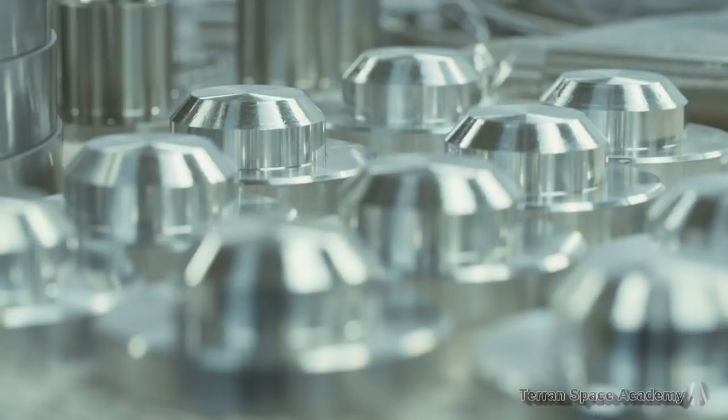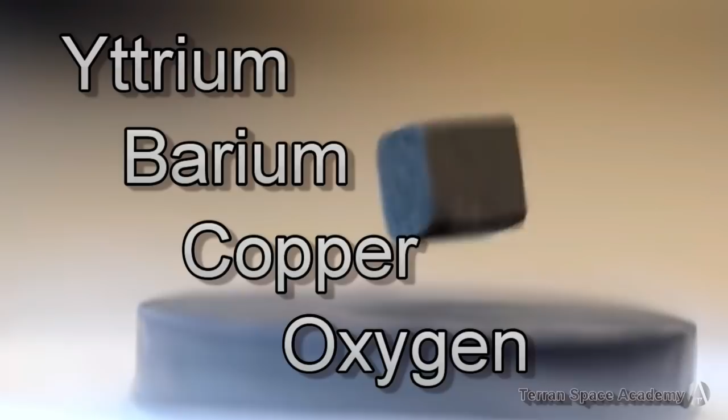Now on to superalloys. Superalloys describe combinations of metals that produce an alloy with unexpected strength, hardness, thermal resistance, or another useful characteristic. We see this all the time. None of the elements yttrium, barium, copper, or oxygen are superconducting at high temperatures, but the combination, while not an alloy but a ceramic, produces the high-temperature superconductor used in the SPARC reactor, as we learned in our lesson on superconductivity. We saw in our lesson on Starship Steel how copper and tin make the more durable metal bronze, while alloys of iron can make steel.

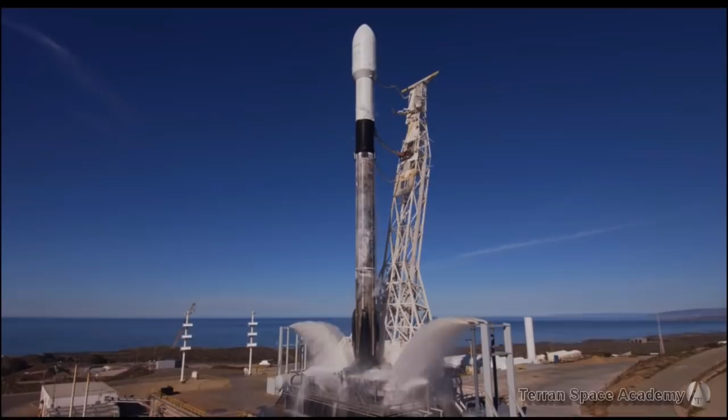And in the lesson on aluminum alloys, we saw that a combination of elements can produce a lightweight but strong version of aluminum that is vital to the success of the SpaceX Falcon 9 reusable rocket. Now we are going to learn about two alloys that have useful characteristics far exceeding those of the elements from which they are composed. The first alloy you need to know is called Inconel.

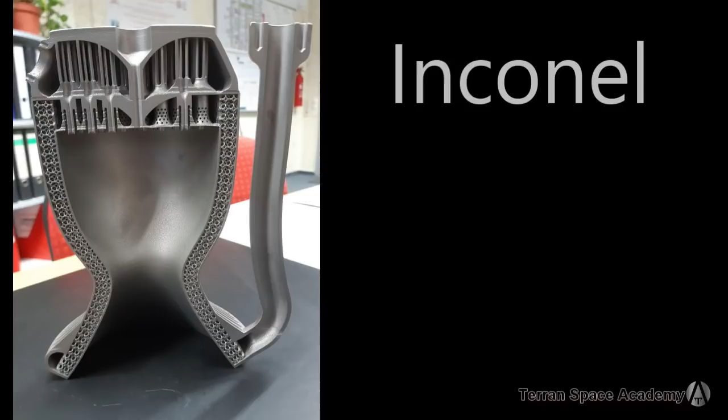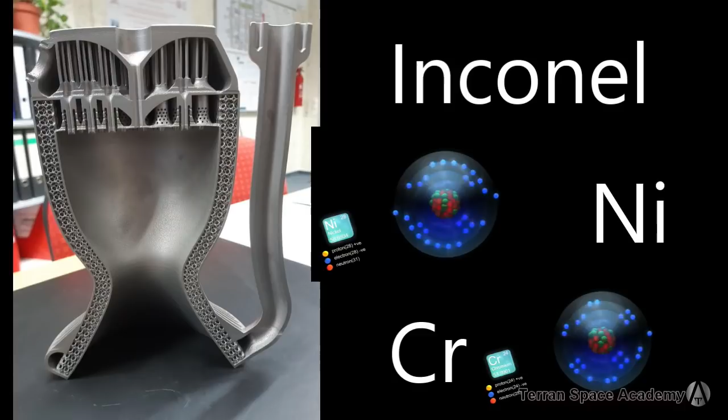This was one of the first superalloys discovered. Now remember that adding nickel to iron makes a strong steel alloy, and mixing chromium to iron makes the corrosion-resistant stainless steel. What if we leave out almost all of the iron and just mix nickel and chromium? Inconel is the trade name for an alloy with this combination, and it is one of the most useful superalloys discovered so far.

One of the characteristics of most metals that limit its usefulness is that oxygen will combine with your metal and break it down. The red sands of Mars are all made from oxygen binding with iron to form iron oxide, rust. When we mix nickel and chromium, we get an alloy that forms a top layer of oxide like the one that forms on stainless steel and aluminum. This is called a passivating oxide layer, which means an inert layer of substance over a metal that protects it from corrosion.

Inconel has amazing strength and is resistant to high temperatures that would weaken any other metal to the point of failure. It is important to realize that the usefulness of any metal is determined by the application you have for it. Aluminum is great for airplanes, but can't handle the heat of re-entry for a spaceship without a lot of shielding, which means added mass.

A metal might not melt at a very high temperature, like wrought iron, but becomes so flexible that it can't hold its shape. We are almost certainly not going to discover new elements out in space, unless there is an island of stability for transuranic elements, which no one has seen any sign of so far. But we will have access to rare metals that could make alloys much better than anything we have now.

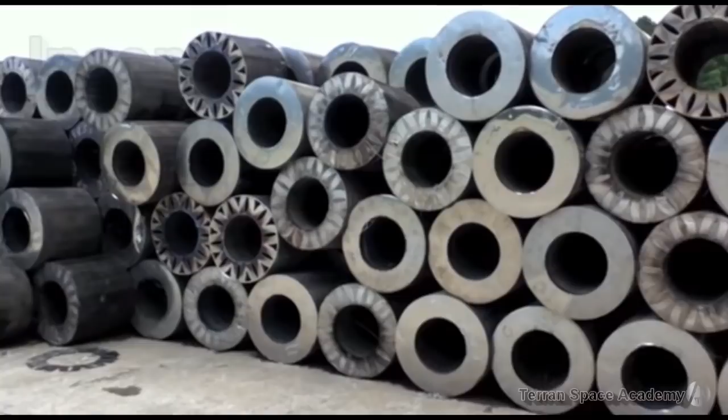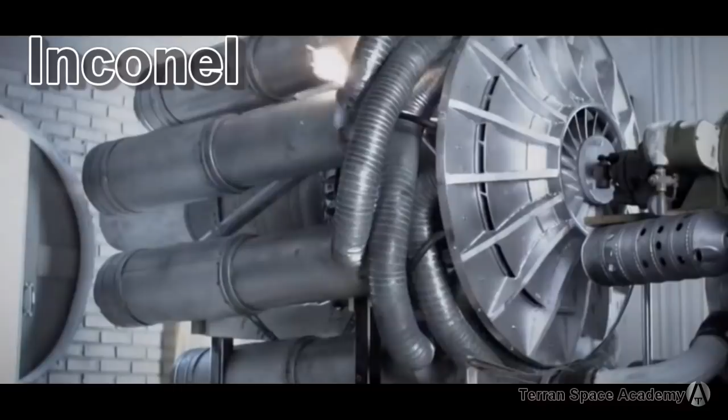Inconel comes in many suballoys for different applications. It was first developed in the 1940s in England as the British were trying to create the first jet engines. They had quickly found that the extreme heat and stress of a jet turbine engine destroyed even the strongest steel. They kept coming up against a problem called creep. Many of us have experienced a creep, but this is different. Creep describes the tendency of a solid material to deform slowly and permanently under continuous mechanical stress.

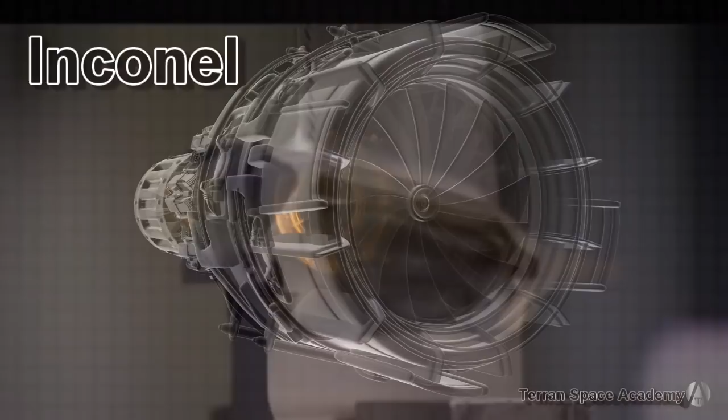Think of spinning a propeller made of soft plastic. It would quickly start to stretch out from centrifugal forces. As the blades of a turbine spin at very high speeds, the blade material will also start to experience enormous g-forces, and this will change the shape of the blade. Steel is only good up to about 500 centigrade. Then it becomes too soft and starts to deform.

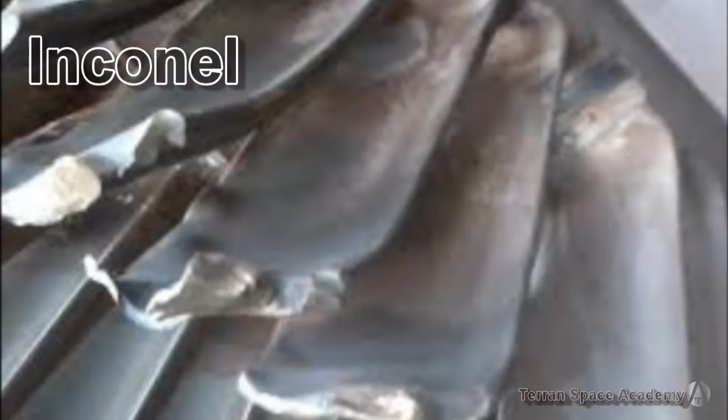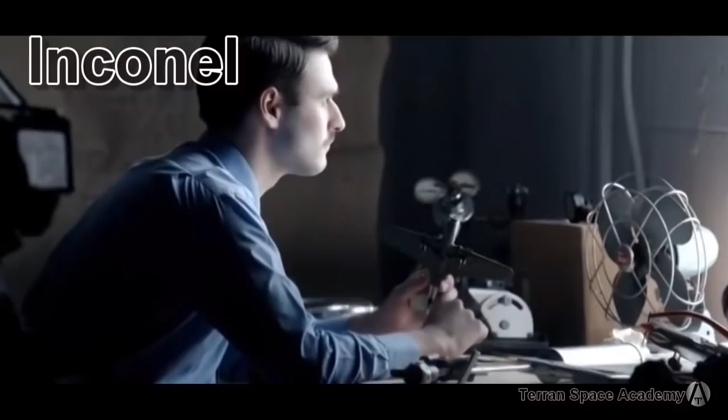Something else was needed. The scientists in Sheffield, England, you will remember, had developed an alloy of iron that we call stainless steel. They also developed Inconel to help Sir Frank Whittle design his turbine engine. And they are still innovating today. They turned to nickel alloys to overcome the limitations of steel. Nickel doesn't melt until it reaches 1455 centigrade and seemed a good starting point. It is also very resistant to corrosion.

You don't see rust on nickel coins in circulation around the world. Nickel easily forms alloys, as we saw when it combined with iron in meteorites to form a natural alloy. Steel and even titanium start to rapidly lose their strength at only 40% of their melting temperature, but nickel alloys stay strong at up to 85% of its melting temperature.

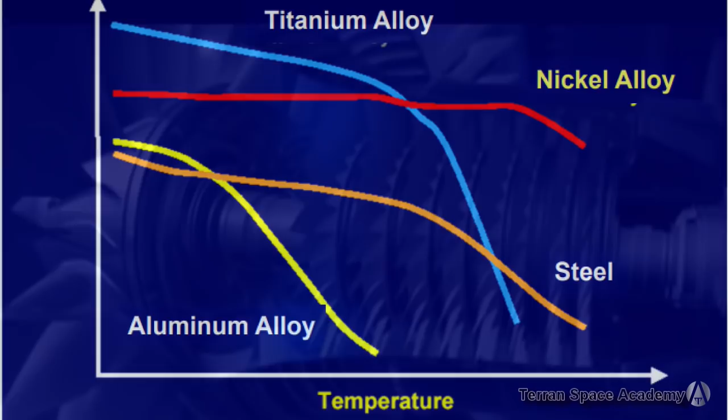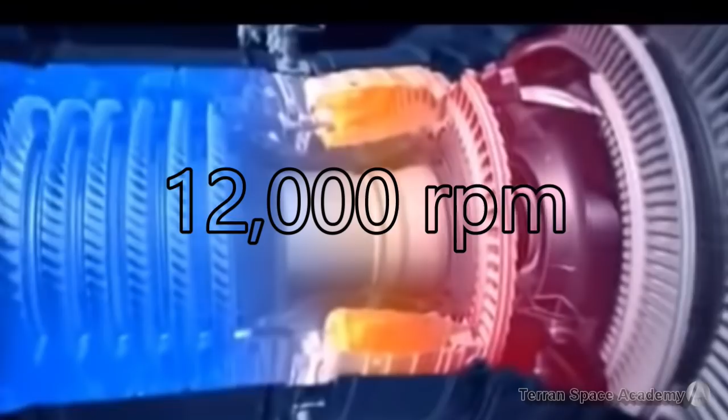The gases from the combustion chamber of a jet engine are at 1,700 centigrade, and the high-pressure shaft spins at up to 12,000 RPM. To keep even Inconel from melting, the blades are cooled by coating them with a low-heat conductive ceramic and have internal channels through which cooler air is routed, much as fuel is circulated around the nozzle and combustion chamber of a modern rocket engine to prevent overheating. This cooling air is around 650 centigrade, well below the melting point of this nickel alloy, and it forms a sheath of cool air around the blade.

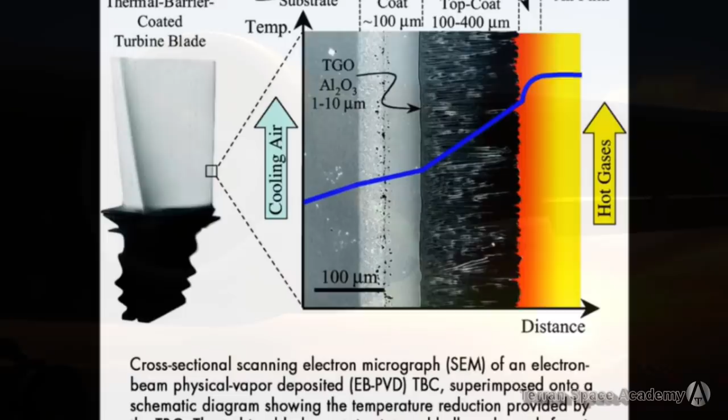This keeps the blade temperature in these engines at around 1150 centigrade. They can easily handle this. Modern jet engines are one of the most refined and dependable machines ever built by humans.

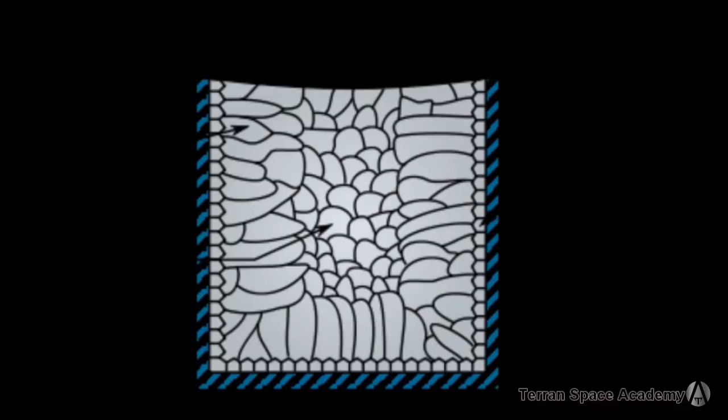Now, crystals form as alloys go from molten to solid. These crystals are just tens of microns across and are randomly oriented. At high temperature and stress, these crystals start to slide against each other, and any impurities create weak points between crystals. This is what causes creep.

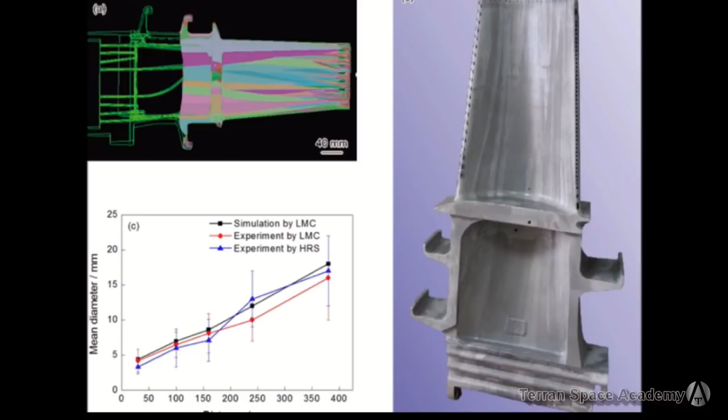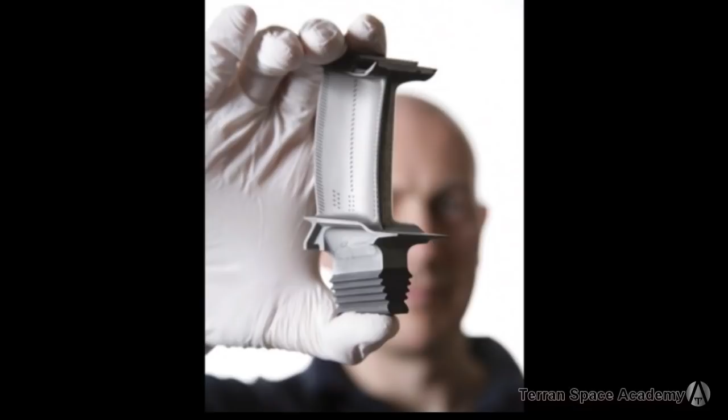The engineers and metallurgists soon started finding ways to make all the crystals line up in one direction, with their long axis in line with the stress. Other alloys of nickel are possible also. Rolls-Royce has funded the development of single crystal metal alloy blades for their turbines. This means that the entire turbine blade is cast in such a way that it is all one crystal, with no boundary layers.

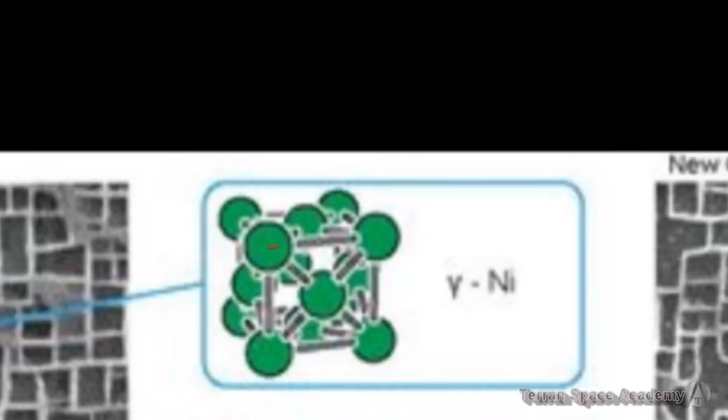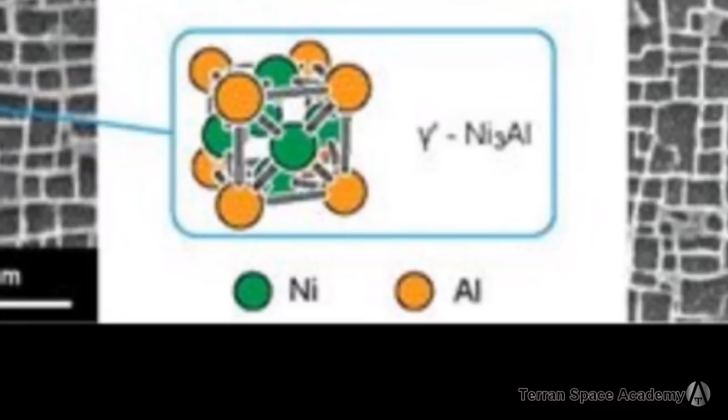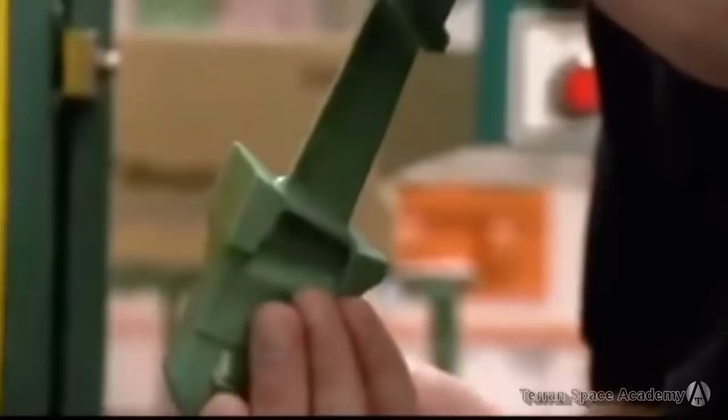The process to do this is extremely complicated. They first make a ceramic core that has the internal cooling channels in place. They inject wax to form the shape of the blade. Platinum pins are inserted to support the core inside the wax. Then the form is coated with a mixture of aluminum silicate to form a ceramic coat. Several more coats are applied, and then the wax is melted out, leaving room for the alloy.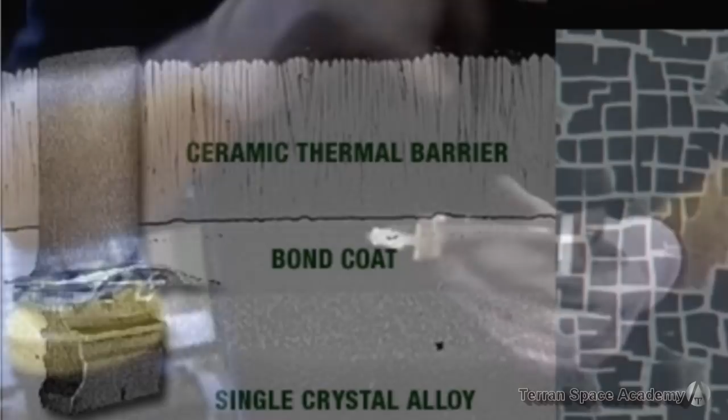The ceramic mold is then heated in a furnace, and molten alloy is poured in through a helical structure to spin the molten alloy for even distribution. The mold is filled and the alloy hardens. The ceramic mold is dissolved in a caustic alkali solution. Holes for the cooling air are precisely drilled out with electrical discharge machining. Then electron beam plasma deposition is used to apply the insulating ceramic coating over the single crystal alloy blade.

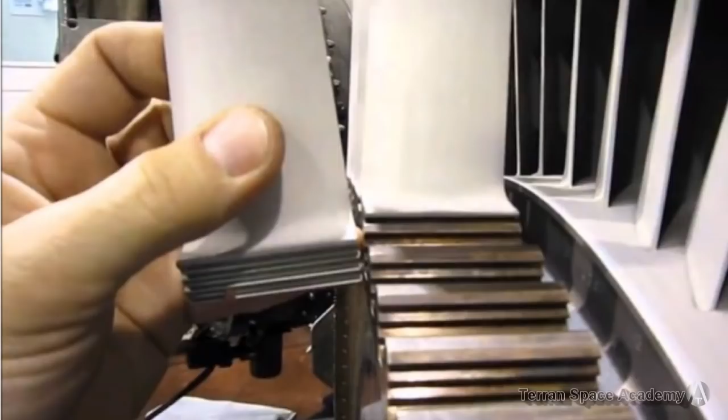I go through this process in detail because you need to understand that this technology is vital to the reusability of rocket engines. One of the limits of rocket reusability has been the turbopump blades. The Raptor engine has been designed for complete reusability. This is a full-flow staged combustion engine with 2 turbopumps.

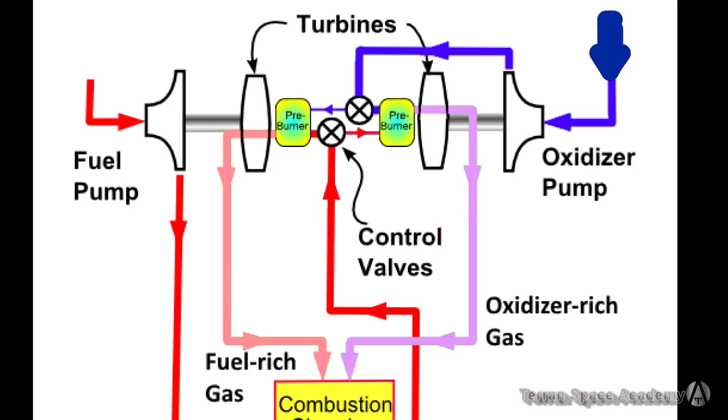There are 2 pre-burners: one where a little bit of fuel is burned with a lot of oxygen, called the oxygen-rich side, and the other where a lot of fuel is burned with a little oxygen, called the fuel-rich side. On both sides you get heat and combustion, but the exhaust of one is still mostly oxygen and the other mostly fuel. The exhaust is fed over a turbine, just like in a jet engine, and the turbine spins up to speed. The turbines are attached to pumps, and as you can see in this diagram, all of the fuel is pumped through the fuel-rich preburner and turbopump, while all of the oxygen is pumped through the oxygen-rich preburner and turbopump. The blades on these turbopumps have to survive the extreme heat and shock of startup, as well as the incredible stress of operation.

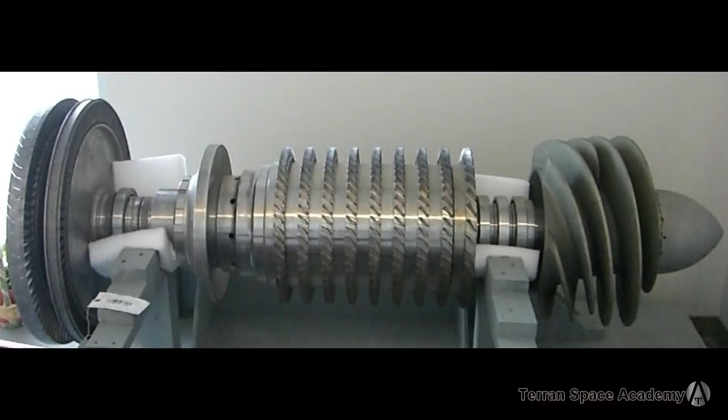In disposable rocket engines, the blades must only survive for a few minutes. In the Raptor engine powering the Starship, they will need to operate for hundreds if not thousands of flights, just like the Rolls-Royce jet engines that let us fly so safely today.

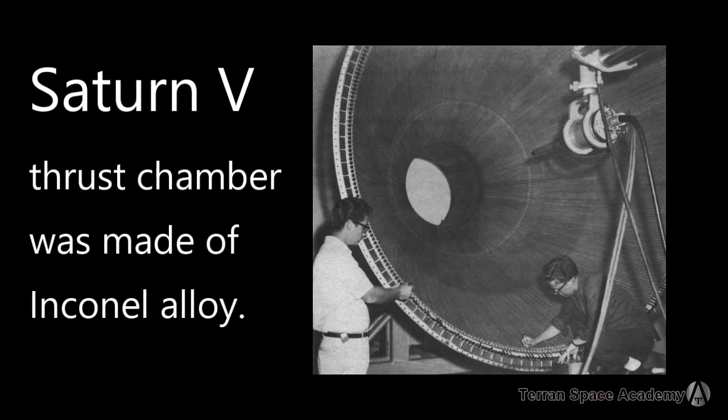Inconel was used for the skin of the X-15 rocket plane so it could survive the suborbital re-entry heat and high speeds of flight. The thrust chamber of the F-1 rocket engine on the Saturn V was made of Inconel. The space shuttle was held to the launch platform with 8 Inconel studs that could support its entire weight and were explosively cut for launch. The Merlin engine on the Falcon 9 is made of Inconel, and the Super Draco rocket engines on the Dragon crew capsule are 3D printed out of Inconel.

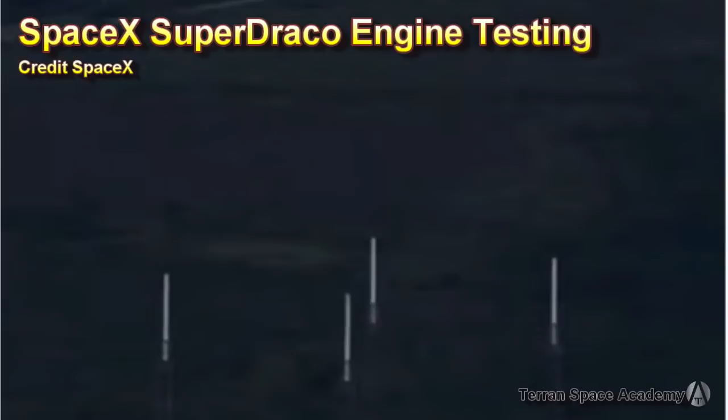Nickel and chromium-based alloys used in these applications, and in the Raptor turbopump blades, are the only alloy capable of surviving the high-temperature, high-oxygen environment on the oxygen-rich side of the Raptor engine.

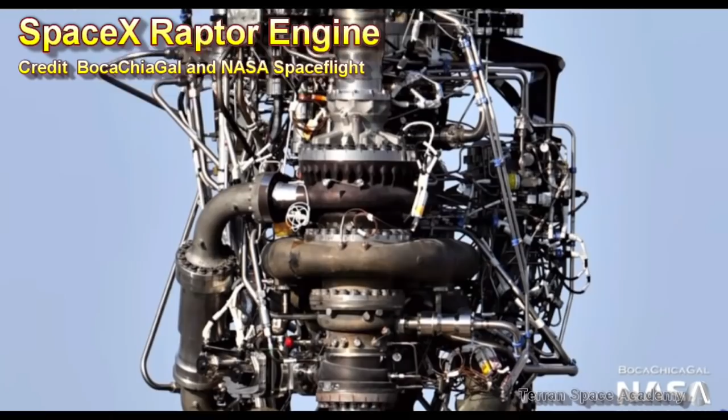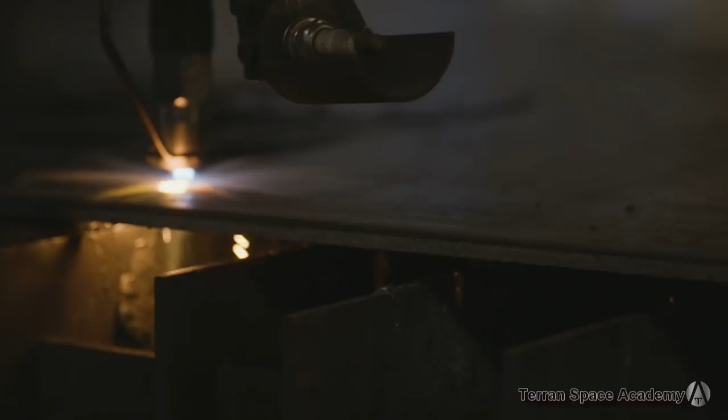Elon Musk tweeted on 22 December 2018 that the SpaceX metallurgy team had developed a superalloy of Inconel called SX500 that could survive 12,000 pounds per square inch of pressure, high temperature, and oxygen-rich gas that would cut through the best steel like a plasma torch. The engine manifold of the Raptor engine will also be made from this Inconel alloy. Here you can see one being cast.

A mastery of metallurgy is one of the most innovative areas of expertise that SpaceX has developed, allowing them to create machines capable of doing things no other company can match. Other companies are trying, though.

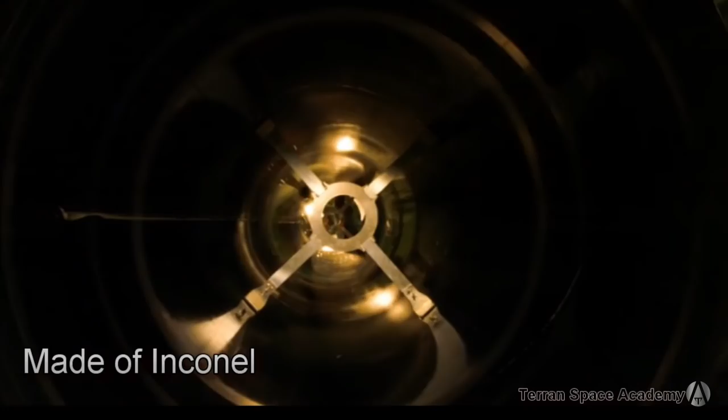Rocket Lab out of New Zealand also uses Inconel in their Rutherford engine. Nine of these small engines power the carbon fiber Electron rocket made at their factory. These engines are manufactured by putting Inconel and titanium powder through a 3D printer that uses laser and electron beam sintering to create all the primary components, including the engine chamber, injectors, pumps, and main propellant valves. Being able to print these amazing superalloys will be a vital part of the space industry in the future.

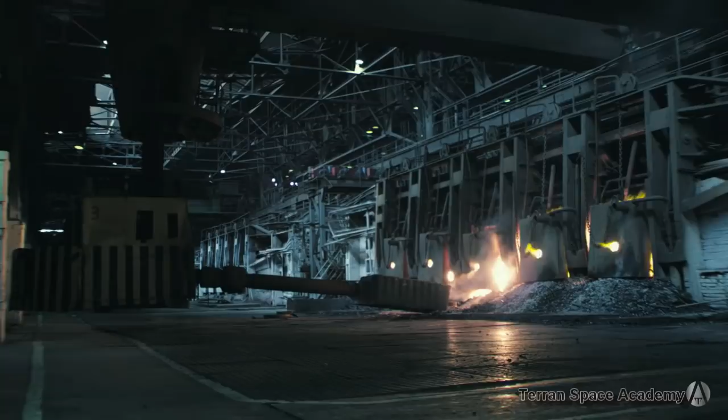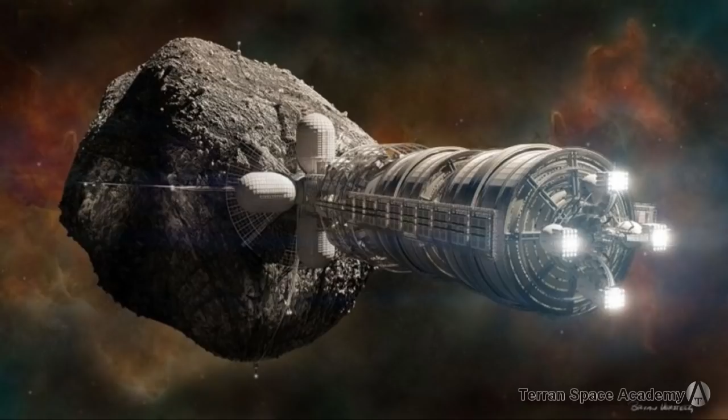You cannot take a foundry with you to an asteroid when you go mining. You can, however, have a good 3D printer on your ship and print yourself a massive cargo hauler with several efficient rocket engines to get your mined precious metals and volatiles to where they are needed. The company Relativity Space has been the most innovative in this field.

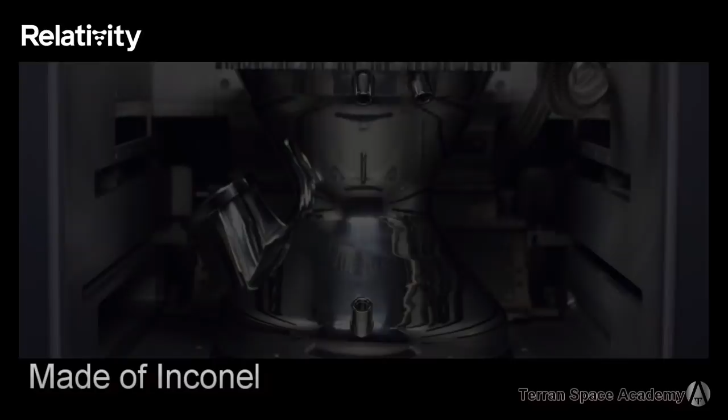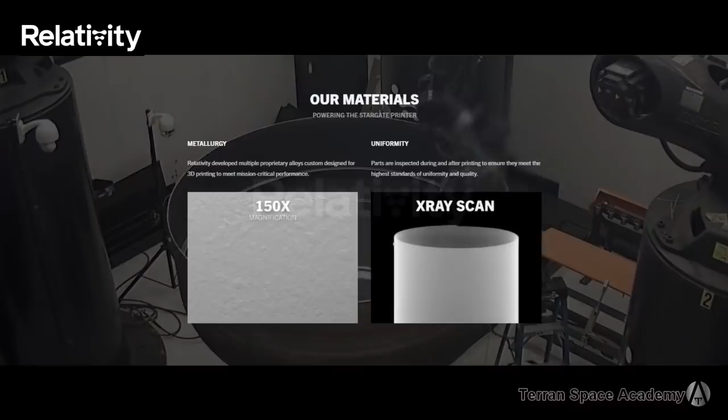This is a good example of why so many areas of technology and science will be revolutionized by space exploration and colonization. Relativity Space has learned from SpaceX's example. It is deploying its own alloys and electronics, and remarkably, it has built incredibly huge 3D printers with the goal of printing a complete rocket from top to bottom. Here you can see their printers producing a rocket propellant tank. What normally takes years can be reduced to days.

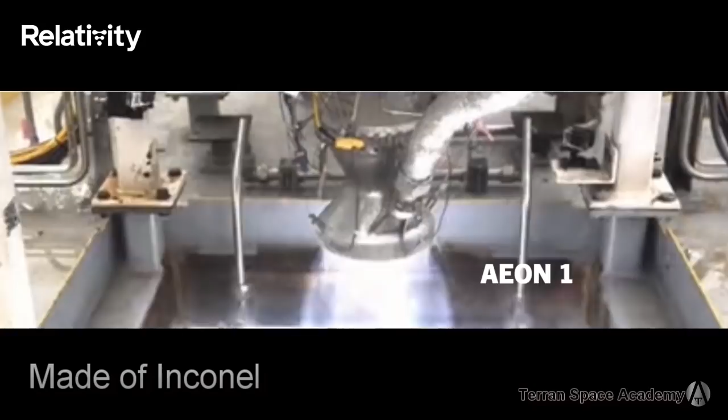They are designing and starting to print their own rocket engines called Aeon for use in an almost completely 3D printed rocket they will call Terran 1. This rocket will use liquid methane and oxygen just like the Starship, and it will have 9 engines, just like the Electron rocket by Rocket Lab and the Falcon 9 by SpaceX.

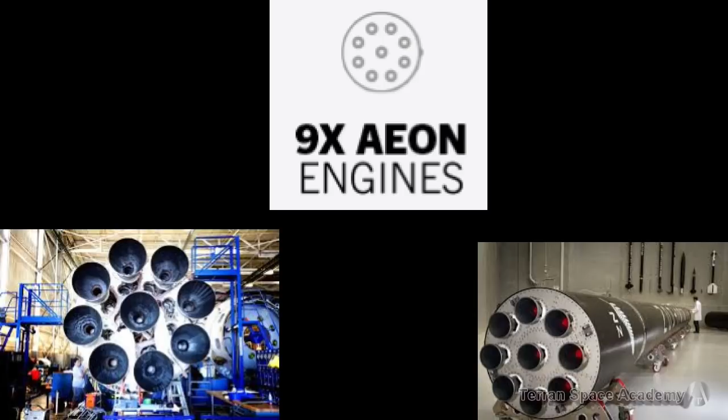This type of innovation, inspired by the success of SpaceX, is what my friends Sebastian and Shishwan over at To the Future call disruptive technology. Disruptive technologies change everything about an industry.

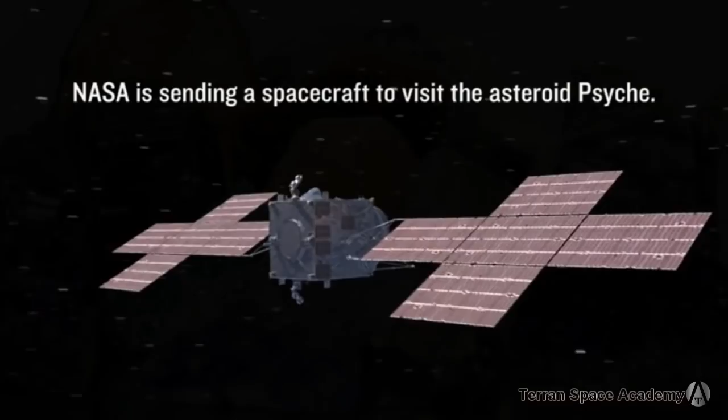Finally, I will speak for a moment about the importance of access to rare earth elements and precious metals. I have often stressed the importance of our civilization having access to these materials, not to sell them on the open market. The gold and platinum market will crash when the first mining ship lands on a metallic asteroid, but for what we can make from these metals.

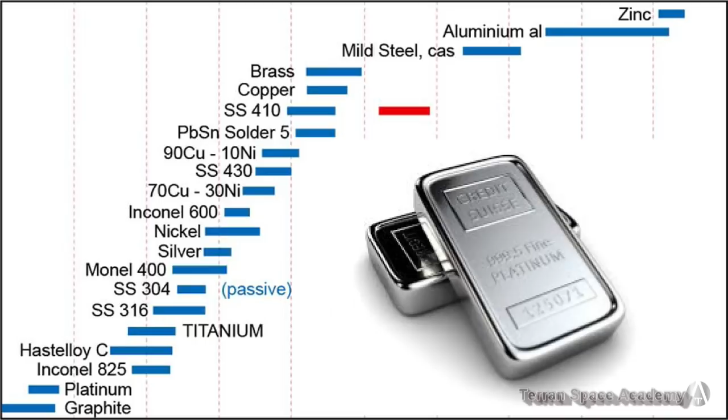If you look at this graphic, you will see that the metal most resistant to salt corrosion today is not a superalloy, but platinum. If platinum were not so expensive, we could have more efficient catalysts for fuel cells and pollution removal. We could have desalination plants in oceans around the world, pumping fresh water into our cities, and not have to destroy our rivers and the wildlife and farmers that depend on them.

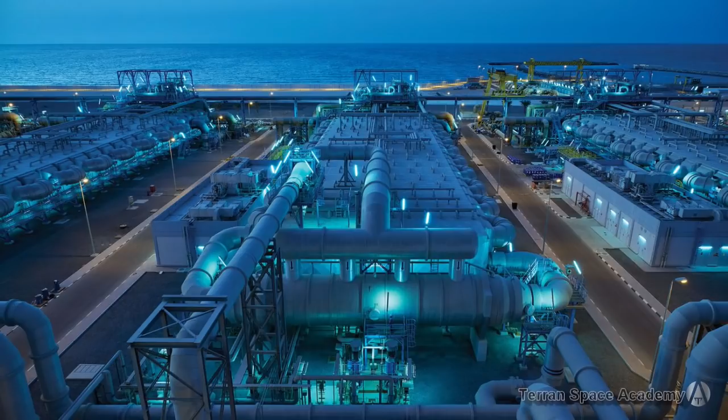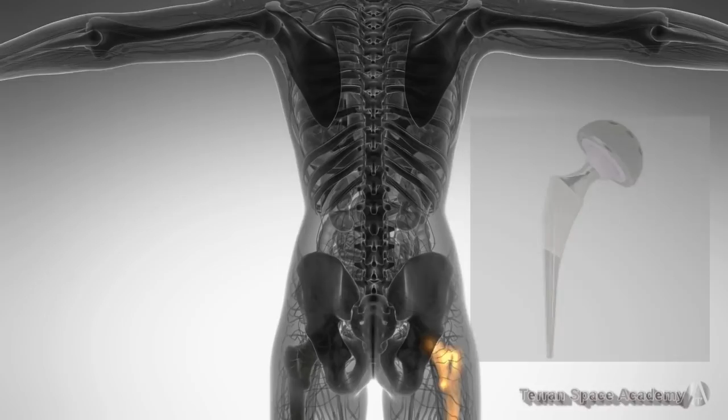Scientists at Rice University were searching for a good metal for artificial hips and other joints. Cobalt steel had been used, but the cobalt would dissolve into surrounding tissues and cause heavy metal poisoning, requiring the joint to be removed. Titanium has been used since it is exceptionally light and strong.

The scientists discovered, however, that an alloy of titanium and gold, which I will call Titaurium because it sounds so cool, was 3 to 4 times harder than the best steels. Now remember from the lesson on Starship Steel that hardness is resistance to abrasion and strength is resistance to deformation. Something can be hard but brittle, like diamonds or tungsten, or strong but soft, like aluminum and magnesium.

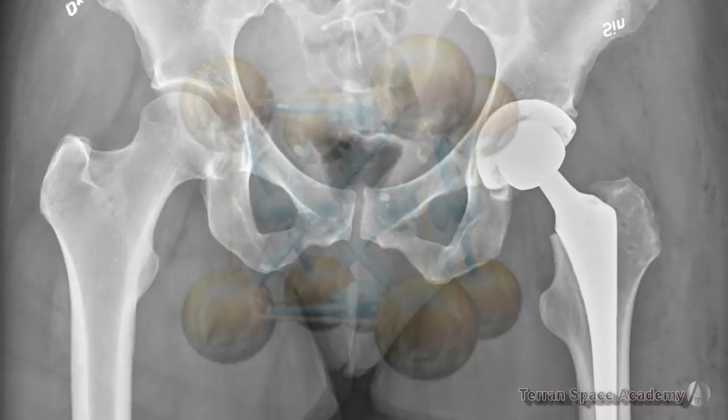For an artificial joint, you need strength and hardness. You don't want the joint to wear out or put metal fragments into the tissues. The scientists found that a 3-to-1 mixture of titanium and gold created this atomic structure. Look familiar? That is 4 times harder than pure titanium and could be great for this and other purposes.

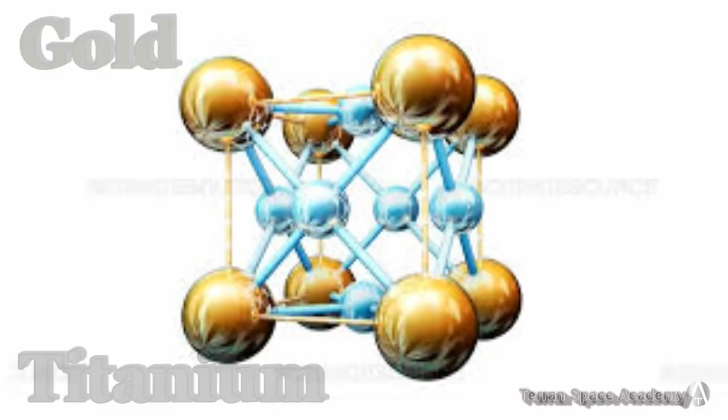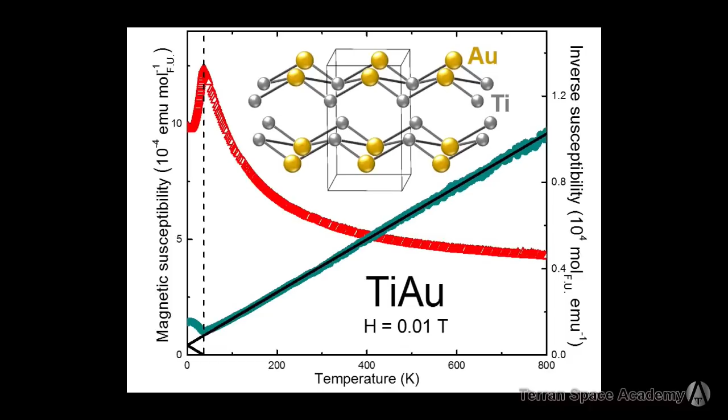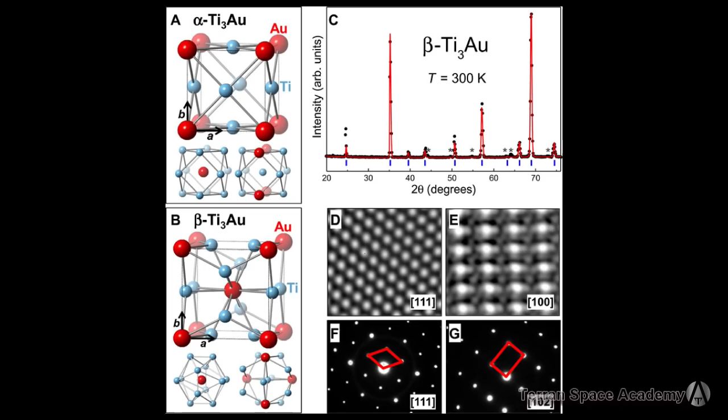Strange things happen with alloys. Scientists found that, while both titanium and gold are not magnetic, a 1-to-1 alloy of these was. It was also found that if you mix titanium with gold at an extremely high temperature, it will form a beta version of its crystal when it cools. This beta crystal gives the alloy its extreme hardness. If it is heated to a lower temperature, it will form alpha-type crystals when it cools, and be no harder than regular titanium. These discoveries were confirmed by scientists at other labs in Texas and Florida.

Superalloys can only be developed if we have access to rare and precious metals in quantities and at a cost that allow us to discover these amazing materials.